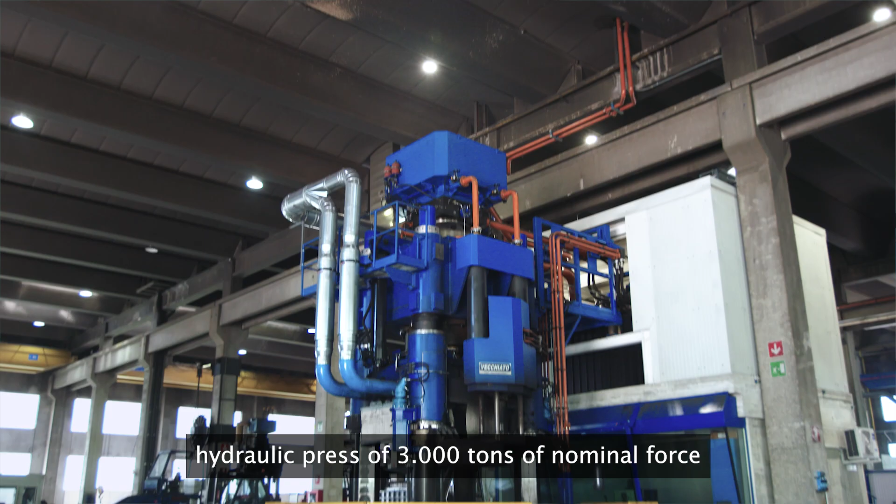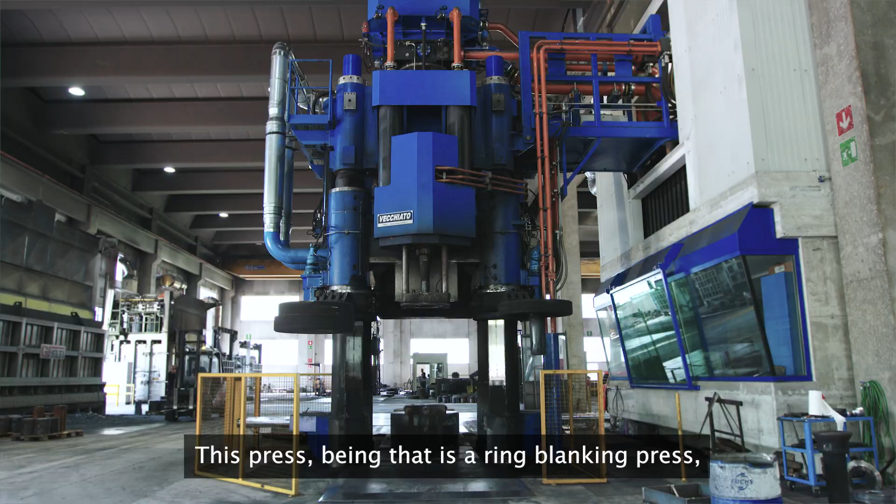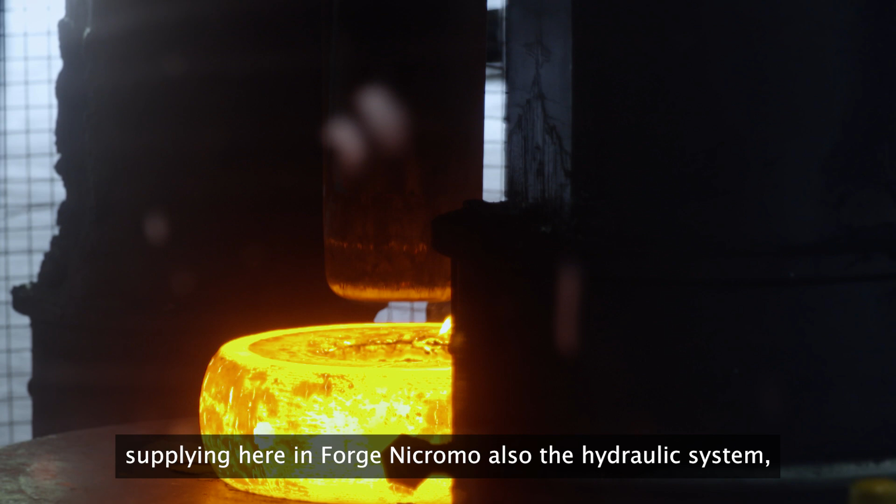Today we are in Forge Nicromo, where Vecchiato company supplied a hydraulic press of 3000 tons of nominal force and 3500 tons of maximum upsetting force. This press, being a ring blanking press, is equipped with a specific system: arms for moving the pins, centering system and punching lateral unit. We are also supplying here in Forge Nicromo the hydraulic system, automation system and electrical system.

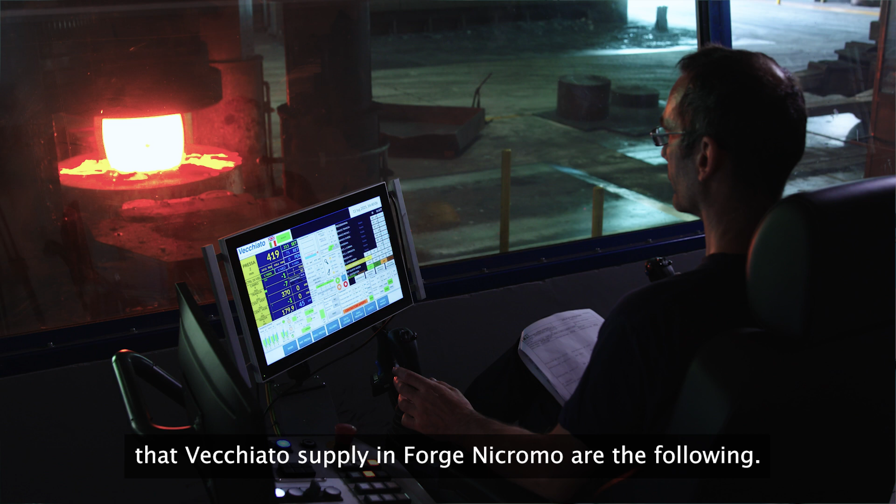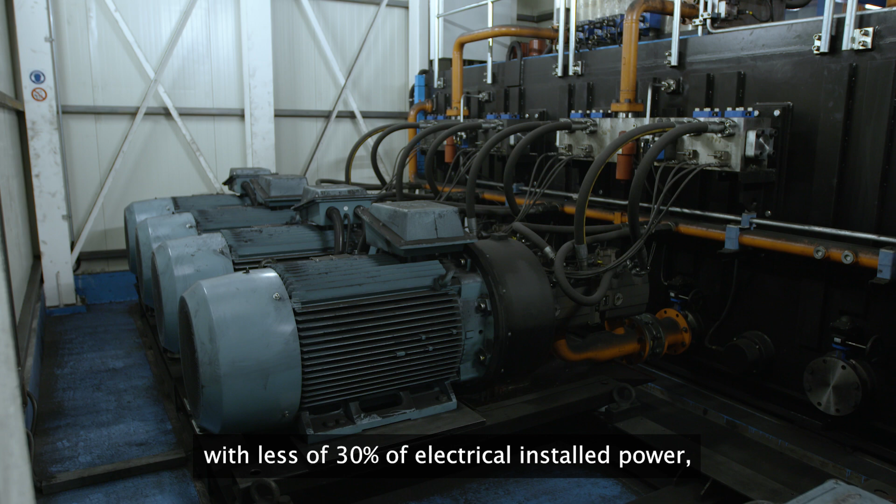The winning factors on this press that Vecchiato supplied in Forge Nicromo are the following. First of all, for more than 10 years, the hydraulic system has been equipped with the patented solution for energy saving. This allows us to supply a press with 30% less electrical installed power, with a really compact solution and layout.

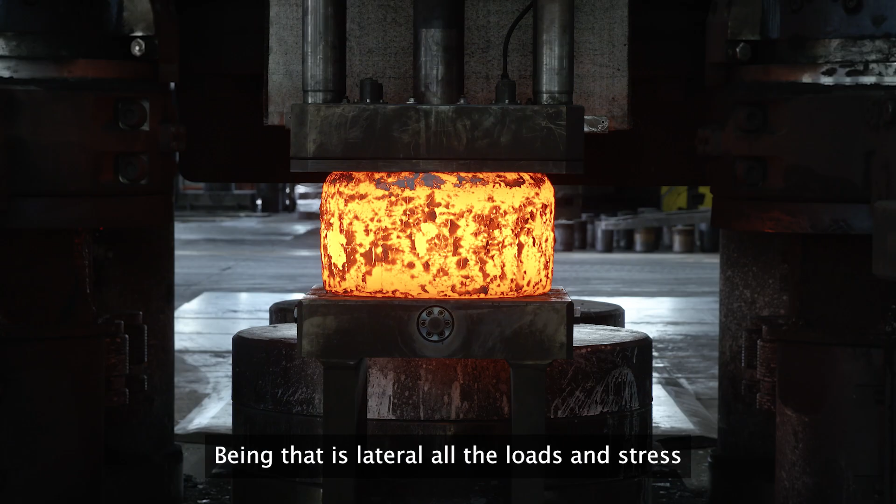Another winning factor is the lateral punching unit. Being lateral, all the loads and stress during the punching process are discharged on the fixed crossbeam. So we are not overloading the movable crossbeam, and so we are reducing the wear of the sliding components installed on the movable crossbeam.

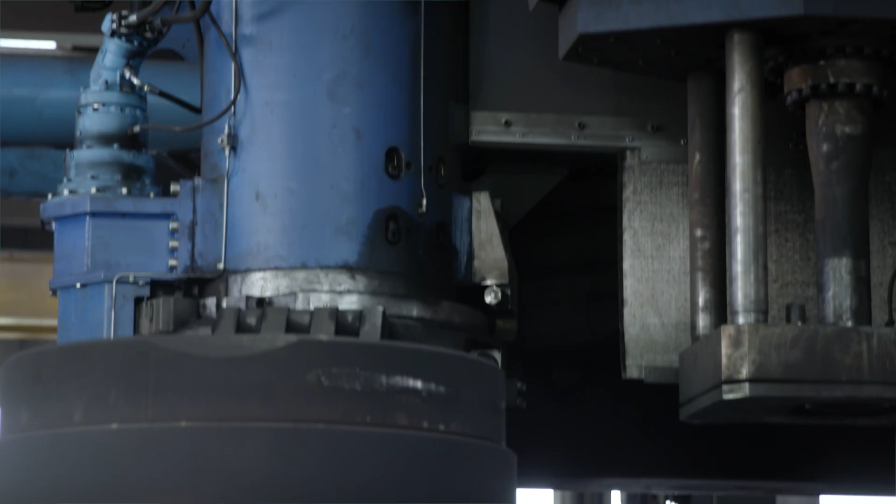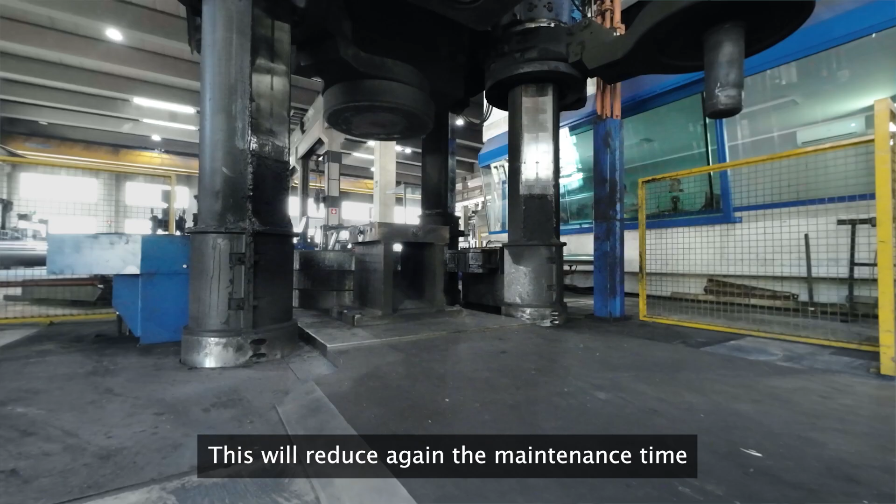Another important aspect is the columns. As our standard we supply pre-stressed columns, and the external surface of these columns is square. This will reduce the maintenance time and will improve the control and easy adjustment of the working gaps of the sliding plates installed on the crossbeam.

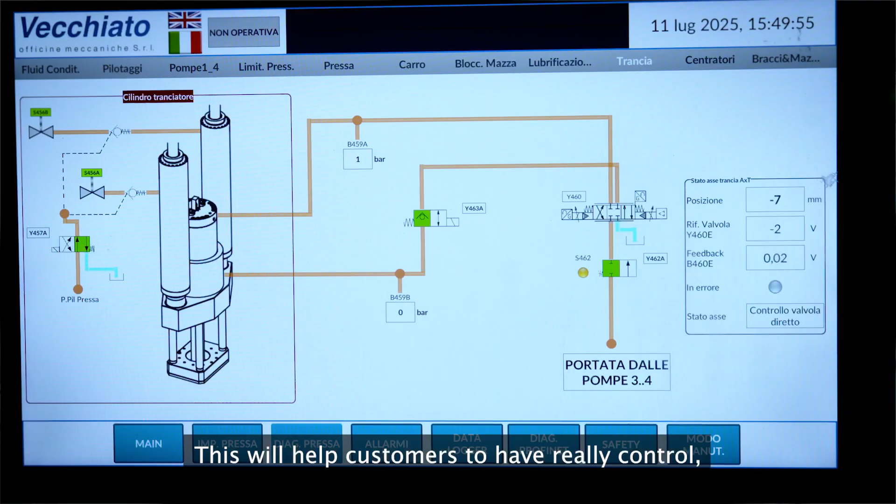Another important aspect is the possibility to record and grab every single working parameter during the entire forging process. This will help the customer to have really full control of the forging process in terms of quality.

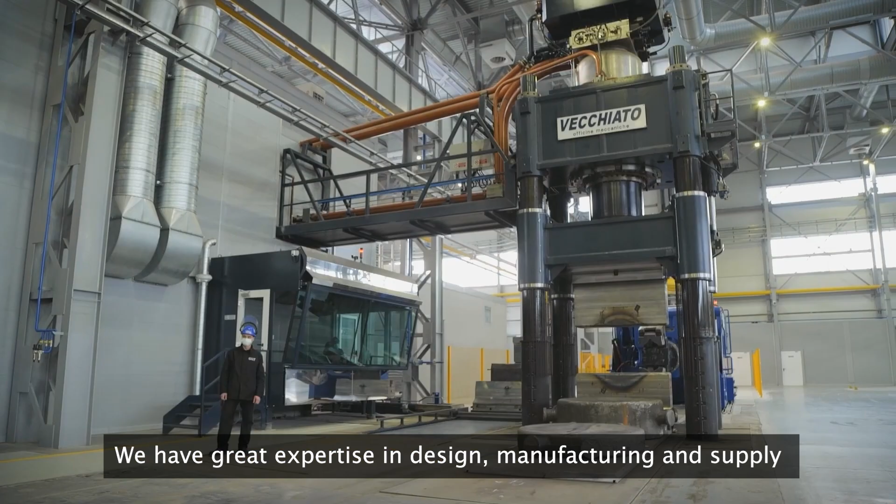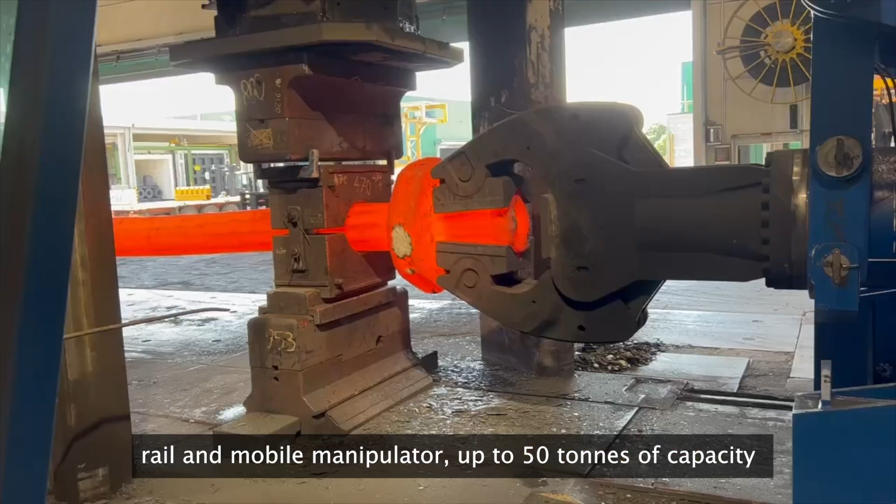Vecchiato Officine Meccaniche is a family-owned company founded in 1977. We have more than 30 years of experience in the open die forging sector. We have great expertise in design, manufacturing and supply of hydraulic presses up to 10,000 tons of capacity, rail and mobile manipulators up to 50 tons of capacity, and also auxiliary equipment like charging machines and straightening machines, as well as electrical, automation and hydraulic systems.

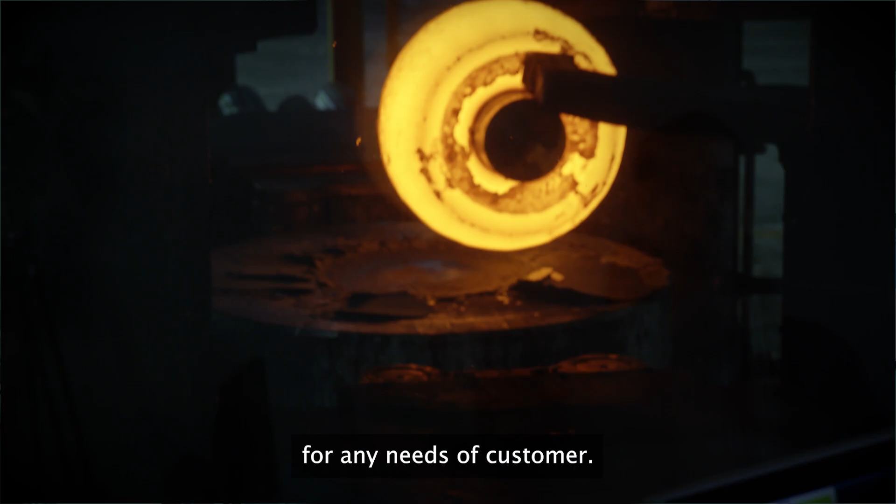The winning factors of Vecchiato company are the following. First of all, we have customized solutions for any customer needs. Then we can supply integrated forging plants under one single point of responsibility, and we are among the few worldwide companies that can do this.

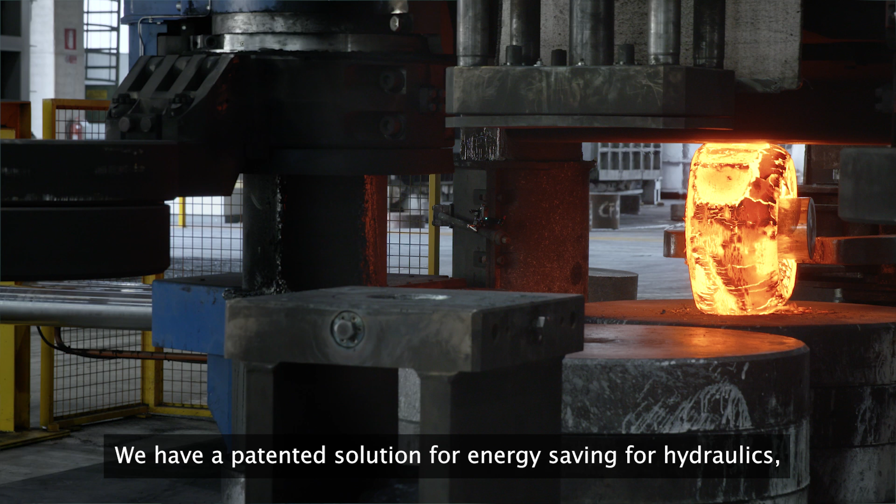We have a patented solution for energy savings for hydraulics, and we also have the capability to record and grab all the working steps and all the working parameters, in order to allow the customer to control the quality of the entire forging process.